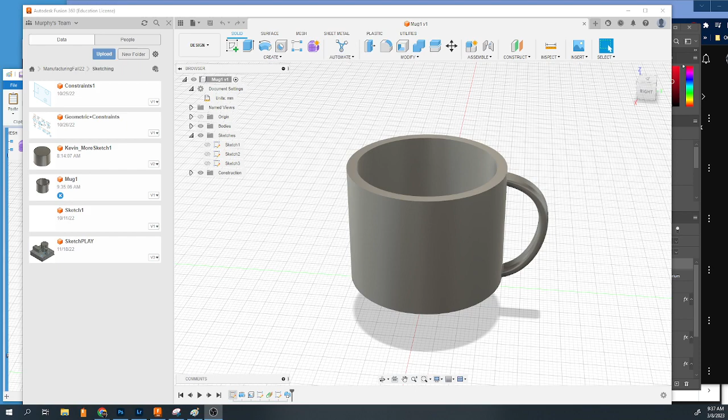So we're going to start our new mug design, and what we're going to do is immediately save it. Save, and we're going to call it mug, or mug 2 in my case, because I already have one, and then save.

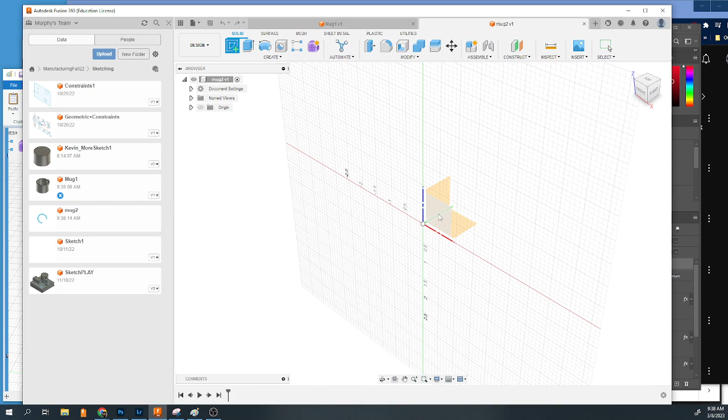We're going to do a sketch on this plane here, so we're looking at it straight on, from the front side. And instead of rectangles, we're going to use the line tool to draw. We're going to draw the half side of it, not the whole side, and then use the revolve.

So to do that, let's drag a line from here to here. When you're done, hit escape to get out of it. Draw another line from here to here, roughly, and when you're ready, hit escape. One more line, let's do from here to say here, and then escape.

Now, instead of just a straight line, let's try a fit point spline. To do that, we'll draw from here, click again, click again, click again, click again, and escape. Whoop, I'm sorry, let's try that one more time.

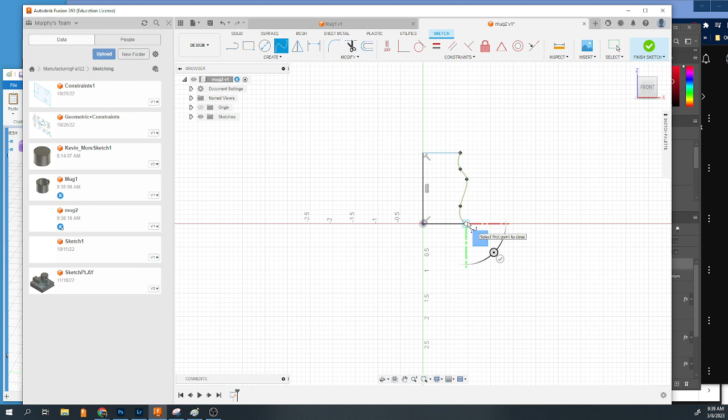We'll use the fit point spline. We'll click from here, we'll click, we'll kind of turn the corner a little bit, come down here, turn another one, and when we're done, we'll hit enter. We can adjust this however we need to by grabbing on these little points here.

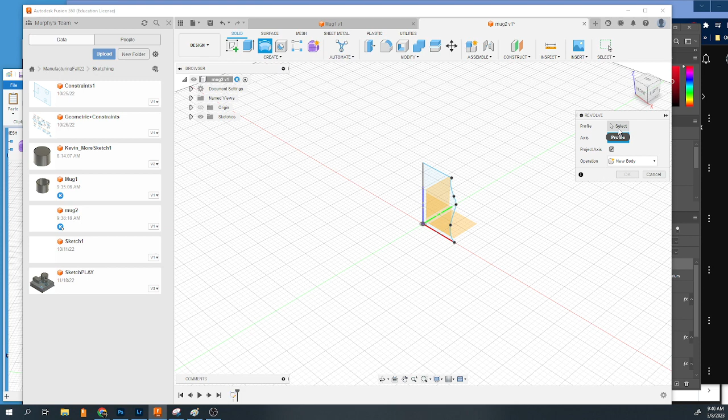Going to hit finish sketch, and now we have this kind of profile, and we're going to use the revolve. So you click on revolve, select your profile, which is this, and the axis, which is going to be the inside piece here. I still have it at 45 degrees.

We want it 360, and you hit OK. So that is kind of the initial look of my cup, which I'm like, maybe I like it, maybe I don't. Let's hollow it out and then go from there.

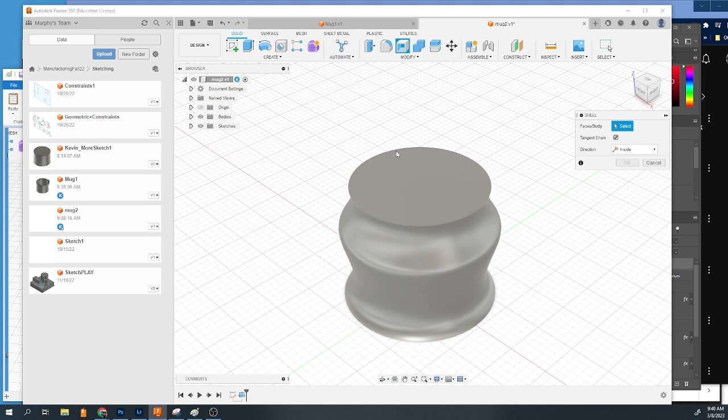So we're going to use the shell tool, that's this one up here. You select this face here, and then you pull it in like that, and you hit OK. Then if you look inside, it's hollowed out.

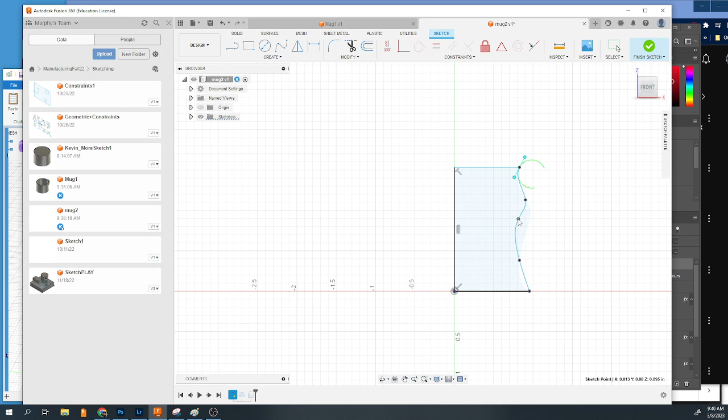All right, so let's say I don't quite like that profile, I want to fix it. You can go back to your sketch and modify this, so I'm going to make it thinner, maybe pull this in here. Pull on these green things and see the bend. Look at that, I can make some really cool bends in there.

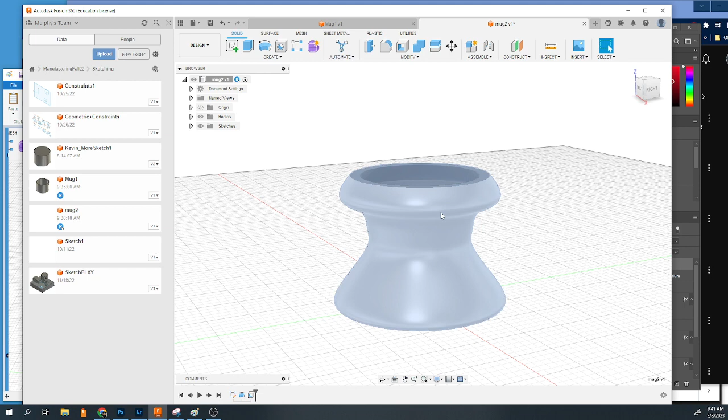Like, oh yeah, I kind of want to do this instead. Then you hit finish sketch, and now you get a different look. So that's a pretty creepy looking mug, but whatever. That's how you can modify your sketch at any time.

And if you need to make it taller, go back to your sketch, and raise this up so it's taller, and hit finish sketch. Okay, my mug is looking pretty silly right now.

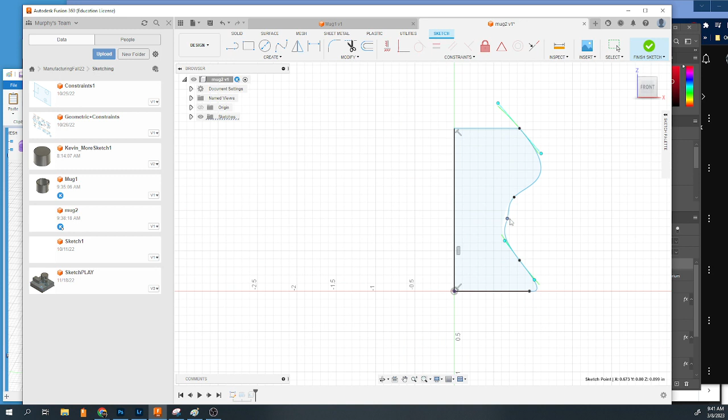So I'm going to make it look kind of more like a cup. I'm going to pull this back out here, maybe do a low contour like this. I like that actually, go something like that and pull this one out. All right, yeah, okay, I'm going to finish that sketch. That's an ugly mug, but it's going to work.

All right, next you're going to do a handle. The handle's going to be a little kind of sticking out the side or whatever. So in order to do that, we're going to create a new sketch. We're going to use the plane, but in order to make sure we got the plane, we're going to click on the origin, and hide the body so we can see and make sure we're on that plane there.

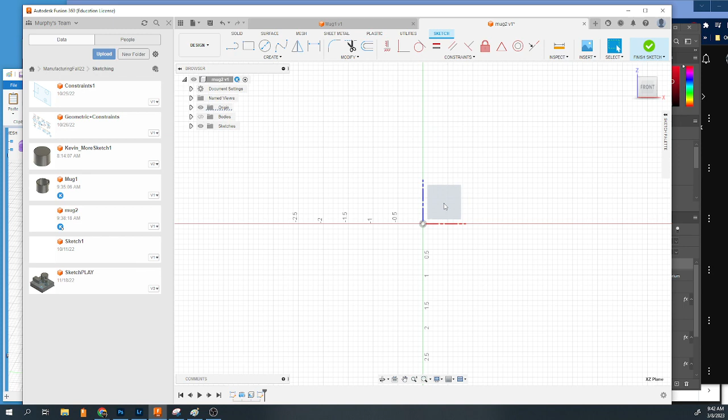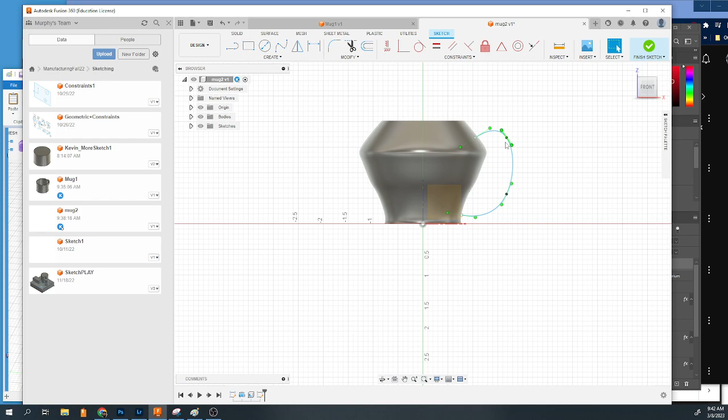All right, so there's where our sketch is going to go, and we could turn the body back on so we can see what we're doing. I'm going to use that fit point spline again and draw kind of a handle. Takes some getting used to maybe. It's a general handle, and I'll hit enter. So I have my handle kind of drawn out there. If you move it around, you can see it's on the edge there. I can alter this at any time, now or later, so just get something to work with.

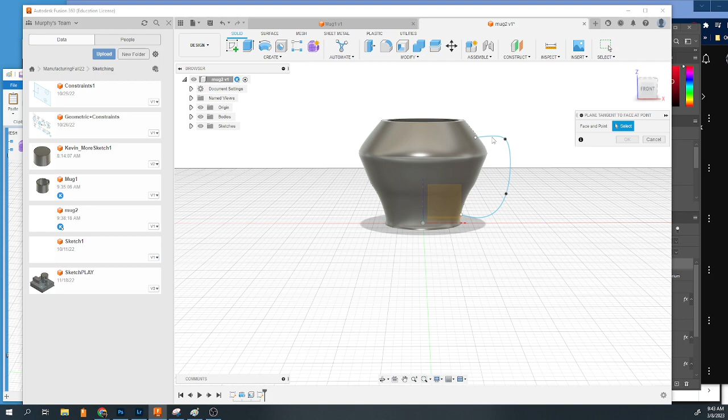All right, finish your sketch. And then we're going to do this one cool trick. You see how we were drawing on this plane here? We want to draw on this plane right here where that dot is. To do that, we're going to go to construct, and it's called plane tangent to face at point. Essentially what we're going to do is say, I want to draw right here on this plane, right at that point. So first you select the face and then the point, and see how it draws that plane on there. So it's saying, hey, we want to work right there. And you hit OK.

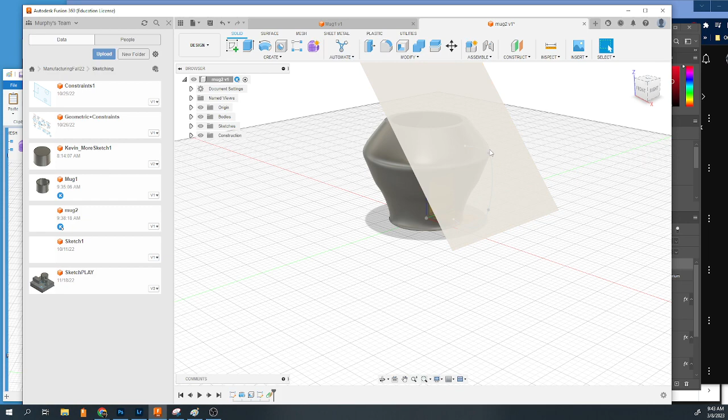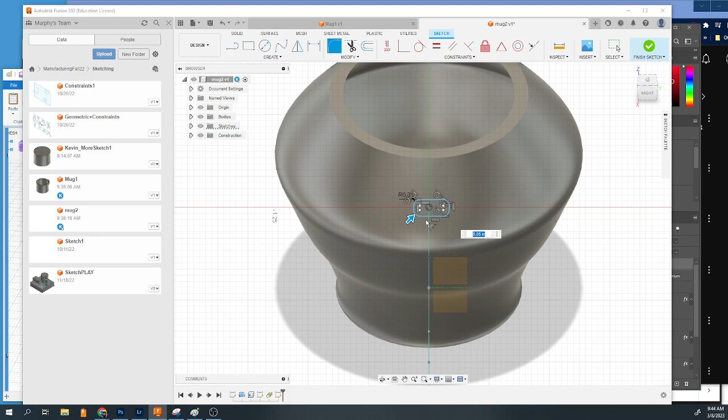Now that it's available, we can draw a sketch on that plane. So I'm going to go new sketch on that plane, drawing on this plane right here, around my original point. I'm going to draw a rectangle, or I can do a circle. But what I'm going to do is add a fillet to the edges of my rectangle so that it's rounded off all the way around, so it's like an oval shape. I'm going to finish that sketch.

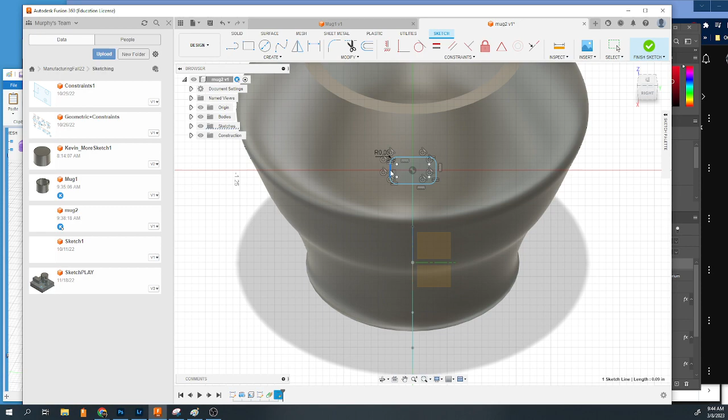Ta-da! So I drew what's going to be the handle thickness all the way around, right? So I drew this out, and if I change my mind, I can double click it. I can go in there and say, oh, I kind of wanted this to be bigger, right? All right, and then you finish your sketch.

And then you go to what's going to be a new thing for you, which is called a sweep. So what a sweep does is it says, hey, I want to take this item and throw it on this path. So this item on this path. What path? This one right here.

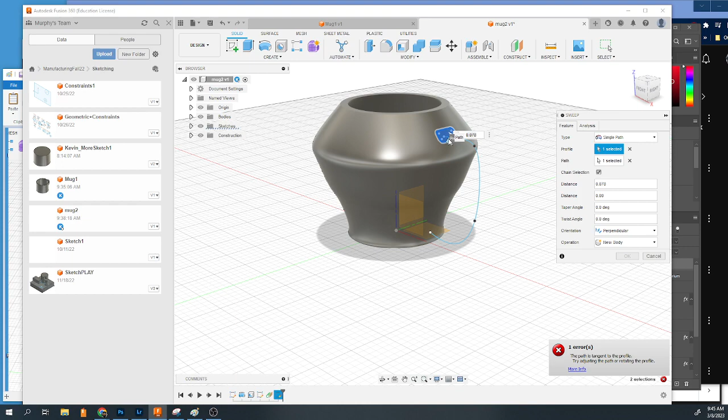And if you pull on this arrow, let's see if I do it right. Path. All right, reset my path. There we go. Okay, so somehow I was selecting on the wrong thing. If you ever make a mistake here, see how I did that? I selected something wrong, I forgot what it was, and I hit the X, and that's how you do it.

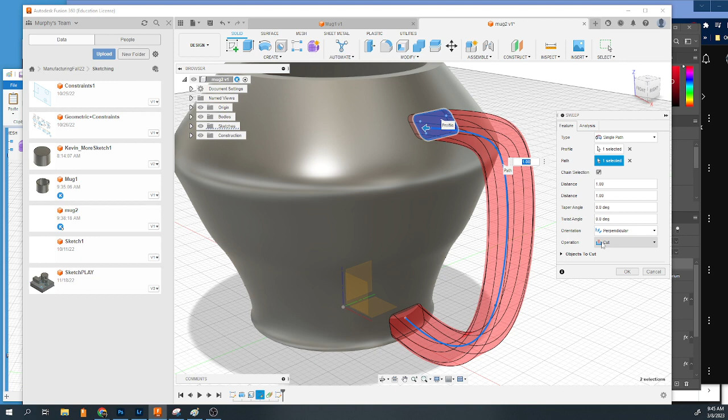Now, red means cut, right? We've learned that from the hole, from the extruding, right? So we want to change it from cut to either join or new body. Let's do join because it's like part of the cup. We hit OK, and we got ourselves a handle.

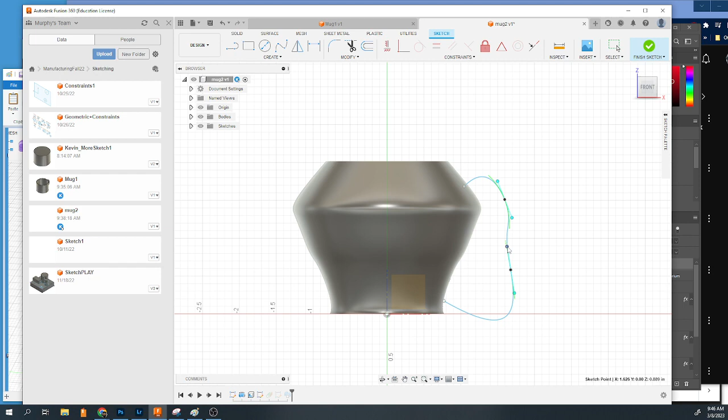Now again, if I want to adjust my handle, I can go into my sketch here, adjust it there, and finish that sketch. If I want to adjust the look of it, I go back to this sketch and say, nah, I kind of wanted it to be like here. Nah, I wanted it to be like that. You can change your mind however you need to, right? You can kind of, ooh, that'd be interesting. All right, so have fun making your cup.

I don't like my design, so I'm going to go back to the drawing board and fix this up a little bit. Oh, pay attention though. If I do something strange like this, now I think my handle went crazy, right? Actually, that looks pretty cool, I'm not going to lie, but I would not like that.

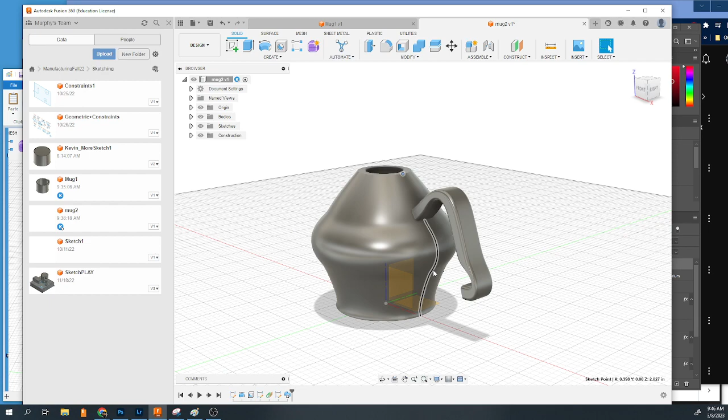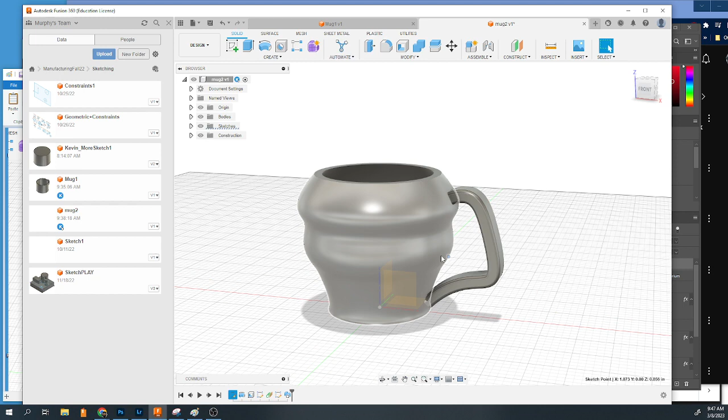So I'm going to undo that first and make it so that the profile doesn't change too much at this stage, because that's what happens. It messes up the whole trajectory of the handle, so you have to pay attention to that. All right, so what you want to do is make sure the cup is well designed before you put on the handle. That way it doesn't go flying like that. All right, enjoy.